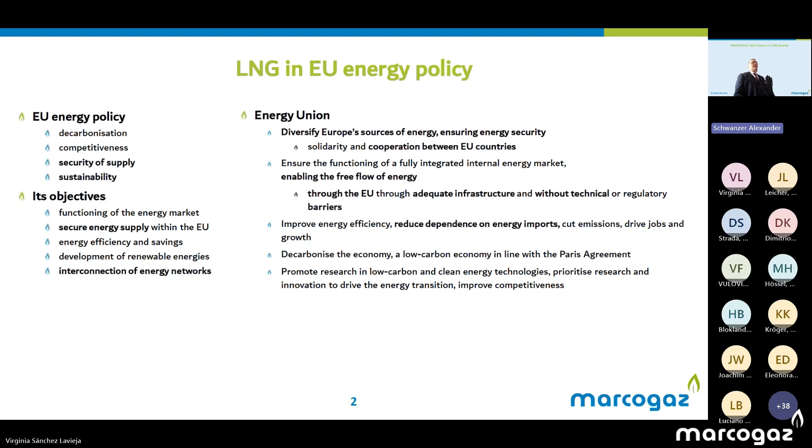Next slide, please. Regarding our achievements within the European community, our general political framework is considered a special achievement of EU energy policy. Behind every energy policy, ladies and gentlemen, is also a strategy for this energy union, which aims to give EU households and businesses a secure, sustainable, competitive and affordable energy supply. The current energy regulatory framework has been adapted with the REPowerEU Plan.

This plan envisages a rapid and complete elimination of dependence on fossil fuels from Russia, as you know. This plan includes, among other things, firstly, the diversification of energy imports. The EU has been working intensively with international partners for several months to diversify energy supplies and curb rising energy prices.

To this end, the member states have established a new energy platform for the voluntary joint procurement of gas, LNG and hydrogen. This energy platform will perform three key functions in joint gas procurement. Firstly, pooling and structuring the increased demand we have in Europe to optimize and transparent use of gas import, storage, and transport infrastructure, with the aim of maximizing security of supply and replenishing storage capacities.

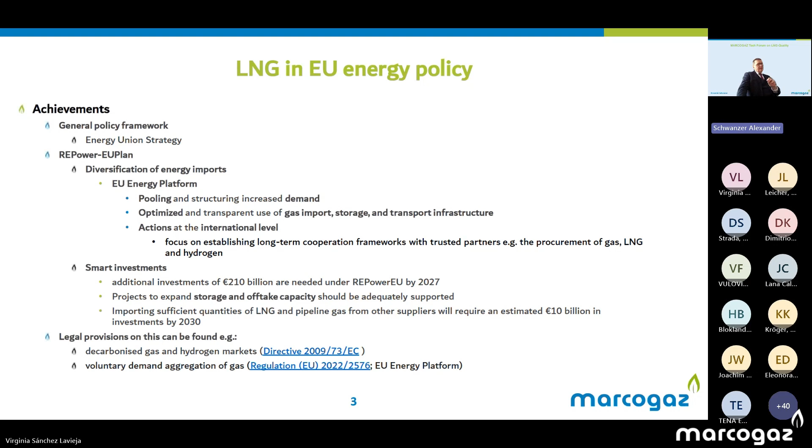Those items being listed can also be found, for instance, in those two legal provisions here on the slide. So, the next and last, third step - our last slide, please.

We know from the current situation that the EU gas demand is around 330 billion cubic meters per year. Natural gas currently represents around a quarter of the EU's energy consumption. About more than 26% of the gas is used in the power generation sector and around 23% in industry. Most of the rest is used in residential and service sectors, mainly for heating buildings.

Following the Russian invasion of Ukraine in February 2022 and its weaponization of Europe's energy supply, the share of Russian pipeline gas in total EU energy imports has fallen dramatically from more than 40% in 2021 to about 18% in 2024. This has been replaced mainly by LNG from the US, which supplied more than 45% of the EU LNG imports in 2024, and reliable pipeline gas imports from Norway, North Africa, and Azerbaijan.

Regarding the global LNG supply, the current situation is expected to continue to rise slightly in 2025, driven by increases in production and liquefaction capacities in LNG exporters. This will ease the pressure on global gas markets and lead, together with historically high levels of gas stocks and subdued demand, to lower prices on the European markets.

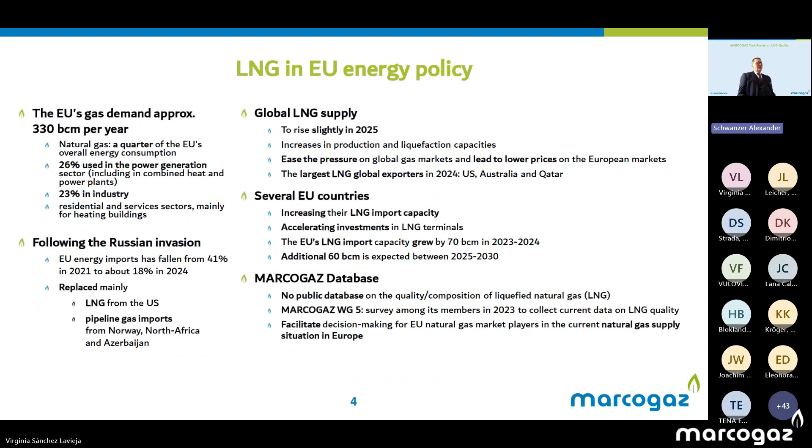And at this point, ladies and gentlemen, I will hand over the floor back to Frederick, our kind expert from MARCOGAZ Working Group 5, and to José, and as well Mr. Jörg Leicher. Thank you. Thank you very much, Alexander, for your introduction and for this first data on LNG in European energy policy.

Our next speaker is José Lana. José holds a degree in chemistry science from the University of Zaragoza in Spain. He has more than 35 years of experience in innovation and R&D activities within Enagás. From 1998, he has participated in many research and innovation projects in the field of LNG, gas transmission and distribution, and utilization of natural gas and now renewable gases, with a special focus on safety and quality issues.

He's currently working at the Innovation and Technical Development Department as R&D project coordinator and gas quality expert, working on projects studying different aspects of natural gas quality, hydrogen impact in transmission pipelines and underground storages. He's been a member for years of several European groups dealing with natural gas and new gases quality, such as NGVA, EASEE-gas, and of course MARCOGAZ, and other groups like the Technical Study Group of GIIGNL. He's also participated in the same working groups dealing with gas quality. Finally, José is currently the chair of Group 5 on gas quality and metering at MARCOGAZ.

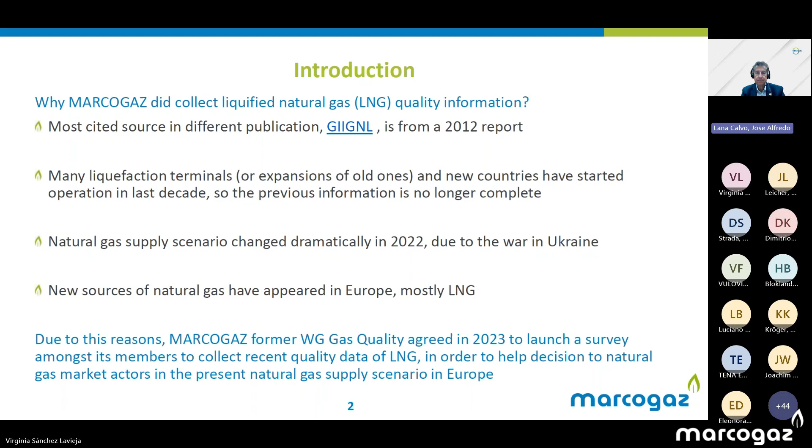Next slide, please. So what is the scope of work we agreed? After a couple of rounds of discussion, we finally agreed on this scope of work: to collect LNG composition data from MARCOGAZ members managing LNG terminals. We want data from each individual cargo downloaded at an LNG terminal—we don't want average data, we want the real quality data downloaded at any terminal for each cargo.

We also ask for information only from cargo coming directly from liquefaction terminals, with no reloading operation between LNG regasification terminals. This is interesting because if you're a shipper, you might download LNG from, say, Qatar in Spain, then reload it and send it to Italy. But in that case we cannot guarantee that the LNG has the same quality as in Qatar, because it may have been blended in tanks at the LNG terminal with another quality. So we want only data from the country of origin.

The idea is to use this information to calculate the main gas quality parameters from different origins. We provide an average gas composition, including the standard deviation, but also the maximum and minimum of each LNG component, to know the maximum percentage that could be expected for each component. Additionally, we calculate the main gas quality properties for utilization, such as gross calorific value, Wobbe index, relative density, and methane number. We present the average of all cargos—values corresponding to the average gas composition—but also give the range of maximum and minimum values.

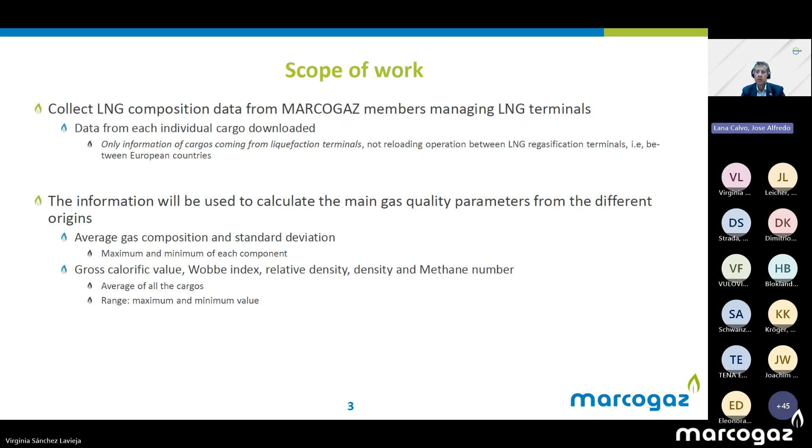Next slide, please. Some considerations regarding the scope of work: it's known that the composition of LNG slightly changes during ship transportation, because LNG is transported at atmospheric pressure in refrigerated, isolated tanks. To maintain the LNG in liquid state, some of it evaporates, taking heat from the LNG and keeping it cold. This means the lighter components, like nitrogen and perhaps methane, evaporate. So the LNG arriving at the downloading terminal is not exactly the same as at the country of origin.

But we consider this change not very relevant. In any case, the information collected from MARCOGAZ member LNG terminals will show approximately the maximum range of composition and properties expected for a specific LNG origin upon arrival in Europe. For instance, LNG from Qatar arriving in Greece is not the same as arriving in the Netherlands—there will be a small difference—but we think the exercise performed allows us to capture the maximum range you can expect.

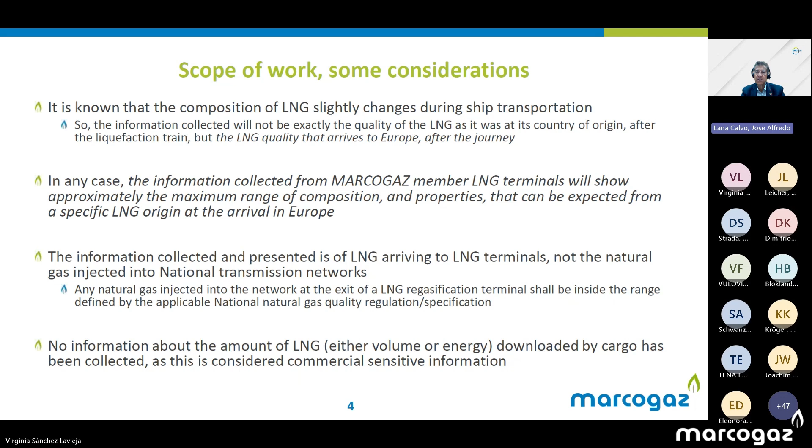Finally, important to say that no information about the LNG downloaded by cargo, volume or energy has been collected. This is considered sensitive information. For this, we have given the report some reference to GIIGNL reports that are very interesting in order to know what is the LNG market, but we are not going to give this information. We think that one of the problems in the updating of the GIIGNL database was the commercial issues associated to the different origins of LNG. We will try to avoid presenting any type of information that could be considered sensitive or attached to commercial issues.

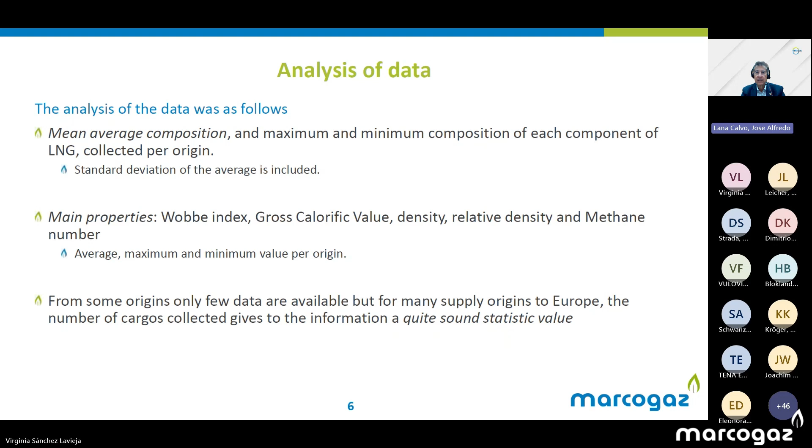Well, going to the different results in composition, we produced tables in which we show the country of origin and number of cargos, the average value of each component in mol/mol, the maximum value of each component, the minimum value of each component, and the standard deviation. Some remarks.

Carbon dioxide is not considered because it's not a normal component present in a measurable amount in LNG. Most of the CO2 is eliminated from natural gas during the treatment of the natural gas before liquefaction. This is one of the main differences between an LNG and natural gas coming directly from the gas field: the absence of CO2.

Neopentane is not considered because its presence is almost negligible in LNG, and besides, most of the gas chromatographs used by the LNG terminal operator didn't detect it. Anyway, as I said, the amount is almost negligible, so it has no impact on the quality of the LNG.

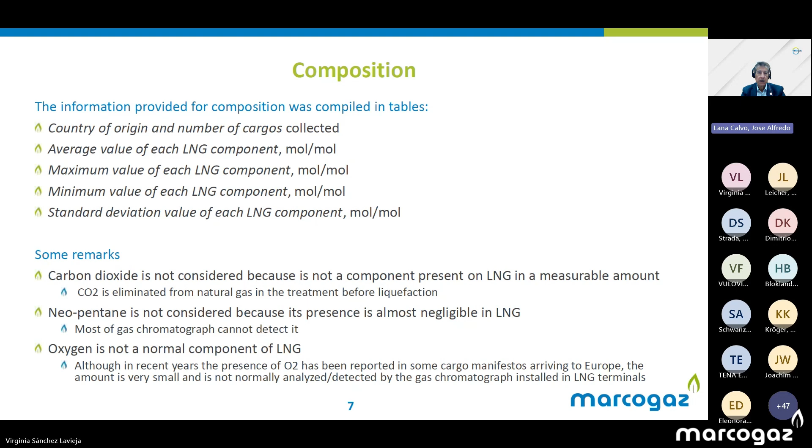Next slide, please. Well, this is an example. In the report we have published, you can find the full tables for the 16 sources. As you can see, in this case from Qatar, Russia, Trinidad and Tobago, and USA, we have the number of cargoes, quite representative I think, and then we have the average composition. The average composition, except if there is an error, should sum to 1. Not the same with the maximum and minimum.

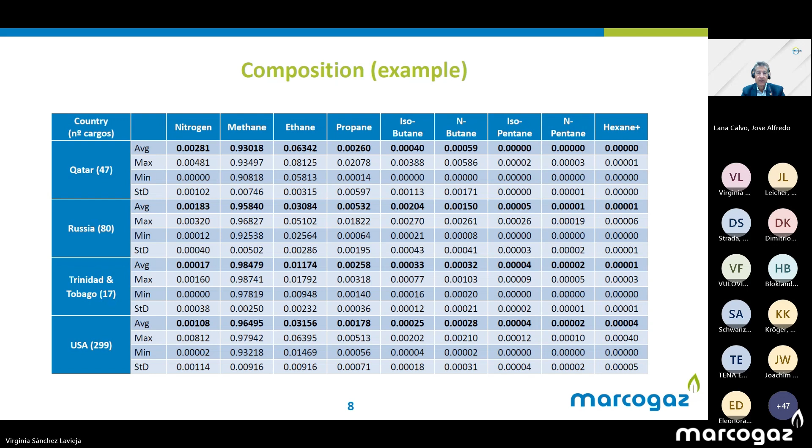Next slide, please. Then, with this information, we have calculated the gas properties. The gas properties have been provided in the report in tables and graphs. For the calculation of the properties, we have presented them in ISO 13443 conditions and following the ISO 6976 standard, which I think is the most used, or the only one used, in the gas sector for calculating gas properties. And for the methane number value, we use Annex A of the EN 16726 standard.

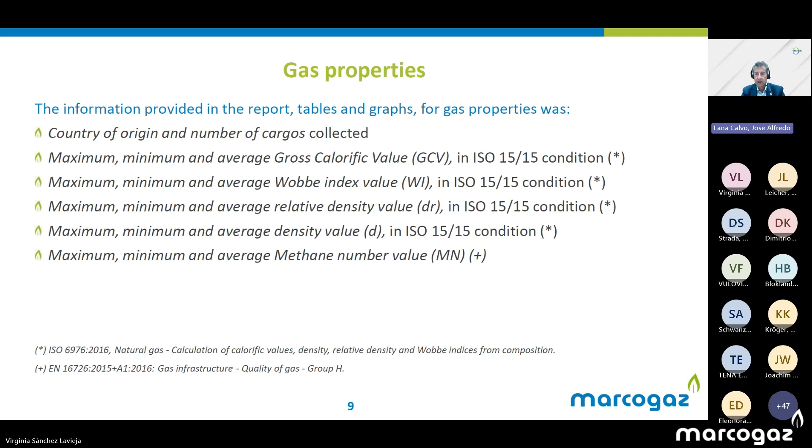Next slide, please. This is the result as we have presented. You can see, in this case, for some of the information received, the number of cargoes for each of them. As is the case of the Emirates, we have only one value, so we have only the average, which is the measured data. We have calculated the GCV, the Wobbe index, and relative density. But for the other origins, we have the average data, and also the minimum and maximum value calculated for the different properties.

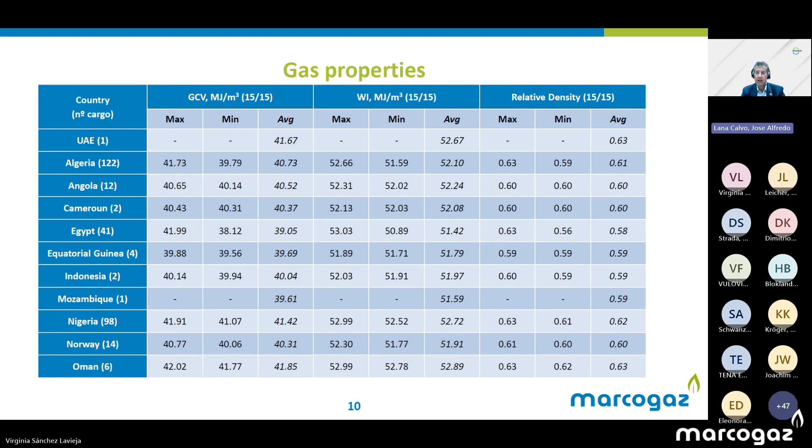If we see this data in graph form, next slide please. What we have presented here is the average, and the maximum and minimum. The average is the dot, and the range, maximum and minimum, is the vertical bar. As you can see, for several countries the range of the delivery is very small. That could possibly be due to a lack of data. But for others, the range is very, very wide. We have not analyzed the reason for this in the report. It was outside the scope, and we think that doing so would require a lot more knowledge about the LNG market than we currently have.

For instance, in the graph for Egypt, you see that the gross calorific value or the Wobbe index range is quite wide. This was quite surprising to me, because in Egypt there are only 2 liquefaction terminals, so the width shouldn't be so wide. But okay, perhaps it's an outlier. I don't know, we have not done that analysis.

It's not surprising, for instance, the value for Qatar or USA, because in both countries there are many liquefaction terminals, each one from a different time and with different technology. That means the LNG will be slightly different from terminal to terminal. Also, in the case of Qatar or USA, there is an impact from the traveling time that, as I mentioned, has a slight impact on gas quality, meaning the properties will be slightly different if we are analyzing data taken in Greece, Spain, or the Netherlands.

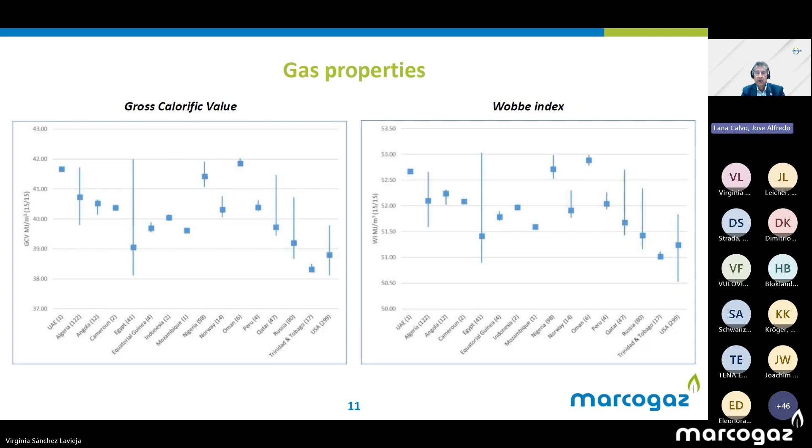Next slide please. Here we have the relative density. We see the spread of the properties from different countries is correlated with the gross calorific value and Wobbe index. The countries in which the range of these properties was higher appear the same in the case of density.

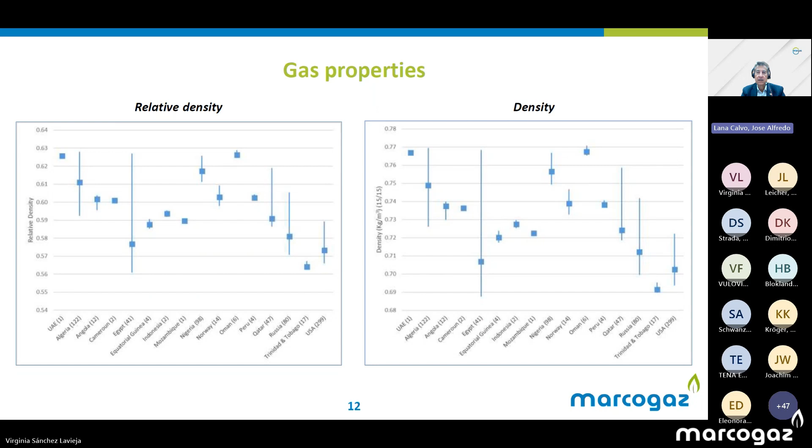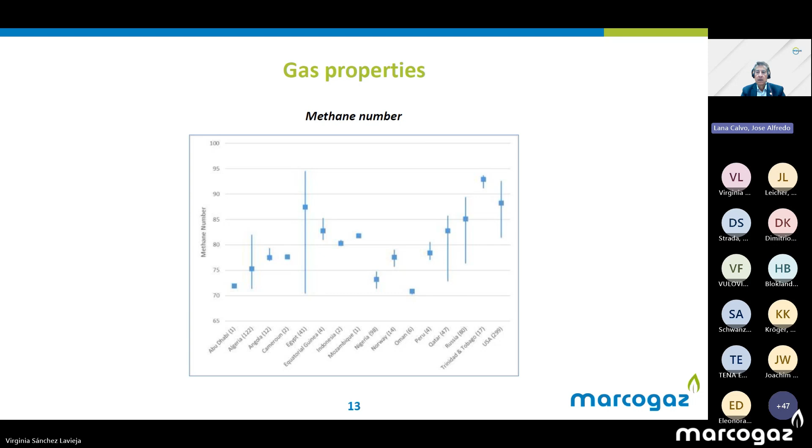So for concluding, what I can say is the MARCOGAZ Group 5 has carried out the exercise of collecting LNG composition information. We analyzed more than 760 cargos, arriving to 5 European countries and from 16 exporting countries. The main properties of the LNG have been calculated and presented in the report, but as we have presented, given the information about the composition, anybody can calculate other properties or calculate the same properties using another calculation method or standard. Finally, the process has been described and published in a report that is available on the MARCOGAZ website. I think that's all.

Thank you very much for your attention. Thank you. Thank you a lot.

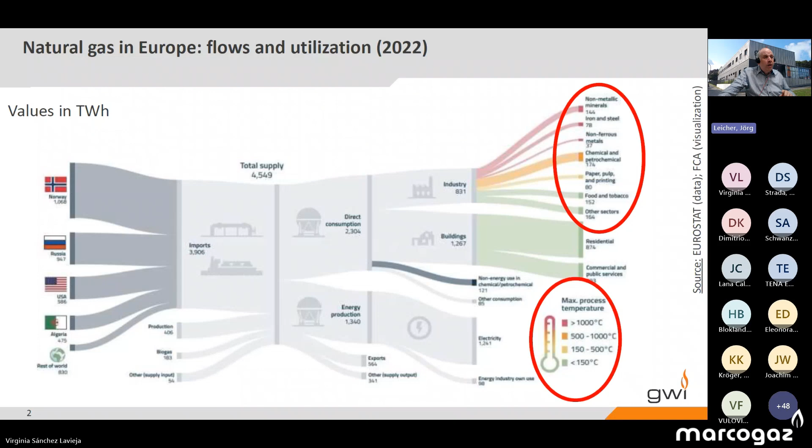However, if we think about gas as a fuel, we can simplify things a little bit. Please keep in mind this is a simplification. But basically, every technical combustion process can be characterized by two process parameters. The first is the firing rate, which tells me how much energy is being introduced into the combustion process with the fuel. The second important parameter is the air excess ratio lambda, which tells us how much air or oxidizer is being introduced compared to the theoretical minimum amount of air needed. If you want to burn something, you don't only need a fuel, you also need an oxidizer, which usually is air.

Note that both these key parameters are directly dependent on the fuel composition. If you want to calculate the firing rate, you need a calorific value—usually in industry, the net calorific value—but you need the fuel composition to some degree. And to calculate the air excess ratio, we need the minimum air requirement, which is also only dependent on the composition of the fuel.

This means that every gas-fired combustion process is in principle always designed and then later adjusted for a specified fuel gas in order to fulfill its purpose in a safe, efficient, and environmentally friendly way.

Now let me say a few words about adjustment, because it's really important. Whenever you put a process into operation for the first time—no matter if it's a residential heating appliance, a gas stove, an industrial furnace, or a gas turbine in a power plant—these systems are always adjusted, which means the volume flows of the fuel and oxidizer are set so that the device fulfills its purpose with optimum performance.

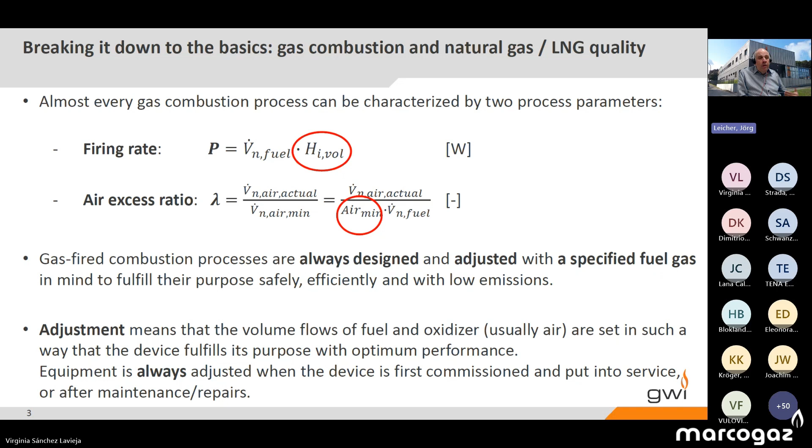Next slide, please. This has a certain consequence when we think about gas quality, because as an end user, I don't really care about the national specifications of gas quality in a large geographic region, like all of Germany or even all of Europe. I'm much more interested in what's happening at my location at this moment in time. And I'm also much more interested in the relative change of the local gas quality compared to the gas that my system was originally adjusted for.

This is a very different perspective compared to what the gas industry does, because if you look at the specifications of gas qualities in Germany or Europe, they tend to talk about large geographic regions and absolute values. They want to give you the minimum and maximum permissible Wobbe index, or the minimum and maximum gross calorific value, or a minimum methane number, or something like that. As an end user, this is nice to know, but it's not really relevant for me.

For me, it's really about the relative change of the local gas quality compared to what my gas was originally adjusted for. Because my system was designed and adjusted for a specific fuel, if there's a change in the local gas quality—for example, a change in the firing rate or a change in the excess ratio—unless I respond to this change, there will be an effect. My performance may not be as good as I want it to be at the design point. Obviously, the stronger the fluctuation, the stronger the consequences of the gas quality change can be.

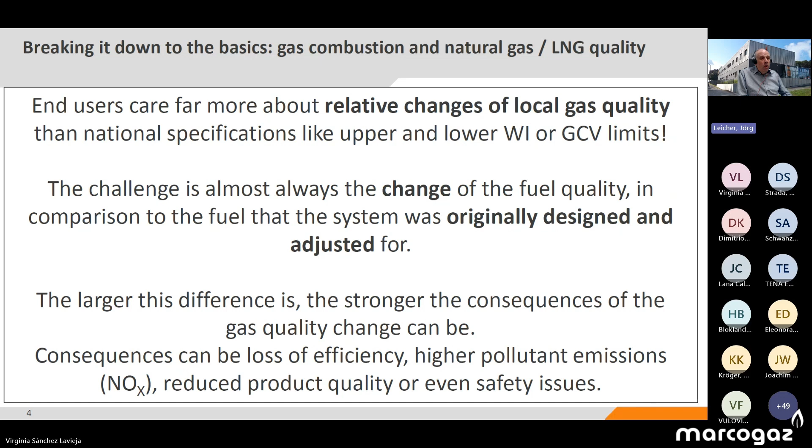Now, obviously, there's a big difference if you look at residential equipment compared to industrial equipment or equipment in power plants. These differences are also reflected in the way these systems are adjusted. For example, if you look at the residential sector, gas-fired heating appliances or stoves are usually operated and adjusted for very high excess ratios.

So we have excess ratios of something like 1.2 to 1.4, so 20 to 40% more air than theoretically needed, which is a lot, but it makes sense if you look at how residential appliances are being used and who is using them.

Second main difference, at least in theory, these appliances are adjusted by the manufacturer on the factory floor to a specified gas quality, usually a reference gas, G20, specified in EN 437, which means basically pure methane. I say supposedly adjusted by the manufacturer because we know that in practice, many installers still adjust residential appliances on site based on an unknown gas composition, which you can do. You don't need to know the gas quality in order to adjust an appliance.

You can use the output data from the process to do that. But at least in theory, residential appliances should be adjusted by the manufacturer, then sealed and shipped to the final destination. Industrial combustion processes, however, have to operate with much lower air excess ratios.

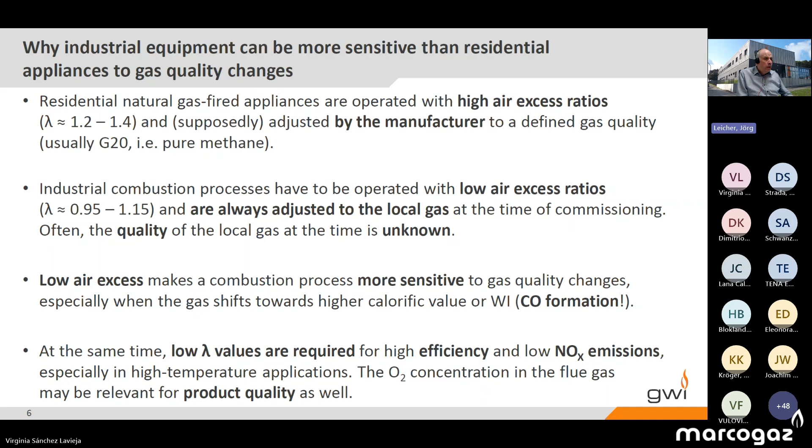So I've been talking about gas quality, and if you look at the discussions about gas quality, usually the Wobbe index has a very prominent role. The Wobbe index was originally introduced as a very easy way to assess the impact of a fuel change on the heat release on a simple, uncontrolled combustion process. By definition, it means that if two gases have the same Wobbe index and are burned at the same nozzle with the same nozzle pressure, they will release the same amount of heat. So these gases are interchangeable in terms of heat release.

I can use a simple gas combustion appliance with both gases without having to physically change the hardware, which is a perfect definition for the residential sector, because that's exactly what's needed there. So the Wobbe index is extremely important from the residential or commercial end user's perspective.

It is also to some degree relevant for larger industrial applications, but not to the degree that we have in the residential sector. So if you talk to industrial users about gas quality, they will usually focus more on calorific values, for example, or maybe methane numbers if you're thinking about gas engines. But the Wobbe index, at best, from their perspective, is one fuel quality criterion amongst many.

And the reason is that the Wobbe index only really considers heat release. So many other important aspects of a combustion process are not described, cannot be described by the Wobbe index. So the Wobbe index doesn't tell you anything about safety, about emissions, about efficiency, about temperatures, about combustion stability.

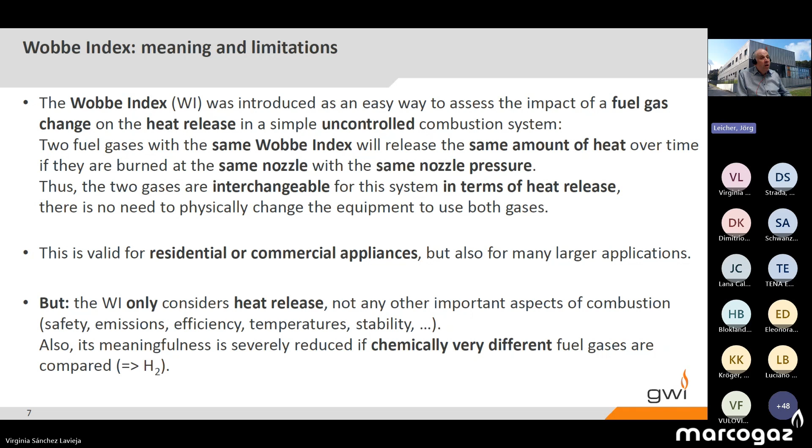And especially in the current discussion about hydrogen, we have to keep in mind that the Wobbe index is only really meaningful for chemically similar fuels. So it makes sense to look at different LNGs in the context of the Wobbe index. It makes sense to look at the differences between L gas and H gas looking at the Wobbe index. But once you start talking about chemically very different fuels, like for example methane and hydrogen, then the Wobbe index is far less meaningful. And I want to show this on the next slide with a brief example.

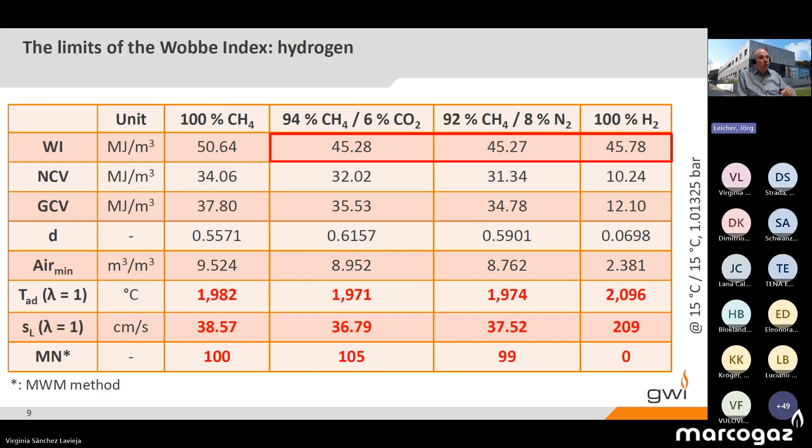So what does all this mean if we think about gas quality, if we think about LNG, especially maybe in regions which are not used to getting LNG? And this is an example, it's an older example from France. France has some experience with strong

locally fluctuating gas quality. So this is an example from 2016, where the grid operator noticed that they had seen 5 major changes of the local gas quality at one measurement point within 2 days.

And a major gas quality change here means something like 2 megajoules per cubic meter, which is about 4% of the Wobbe index. This, if you look at what's permissible in European grids right now by looking, for example, at the EASEE-gas Common Business Practice or what's going to be in the upcoming EN 16726, this is still a relatively moderate change, but from an entry range perspective. But still, for an end user, this is already a very significant change.

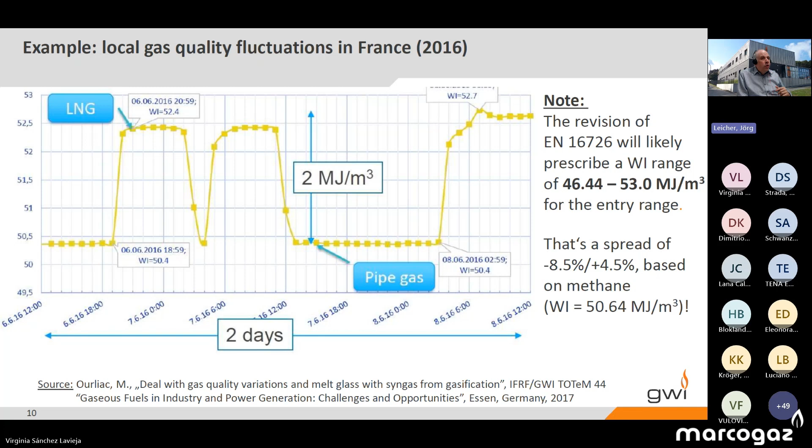So something, a larger industrial furnace, and I adjust it to the locally available gas, which at the moment may be pipeline gas. So with a Wobbe index of 50.4 megajoules per cubic meter, and I adjust it to a reasonable excess ratio, something like 1.05. So what happens to this system if now it's being exposed to LNG with a much higher Wobbe index of 52.7?

We're assuming for the moment that we don't have any combustion control, which you really should have with such a furnace, but I want to show why we are so sensitive here to gas quality variations. So if my system, which was adjusted to pipeline gas, is now being confronted with LNG with a higher Wobbe index, what that means is that, first of all, my firing rate will go up, so I put more energy into the system, which can be a problem, but must not necessarily.

What really is going to be a problem is the excess air ratio here, because my excess air ratio drops from 1.05 to 1, which means I'm running my system basically at stoichiometric conditions, which is an unsafe state because I'm going to produce a lot of carbon monoxide. So this is definitely a safety-related issue.

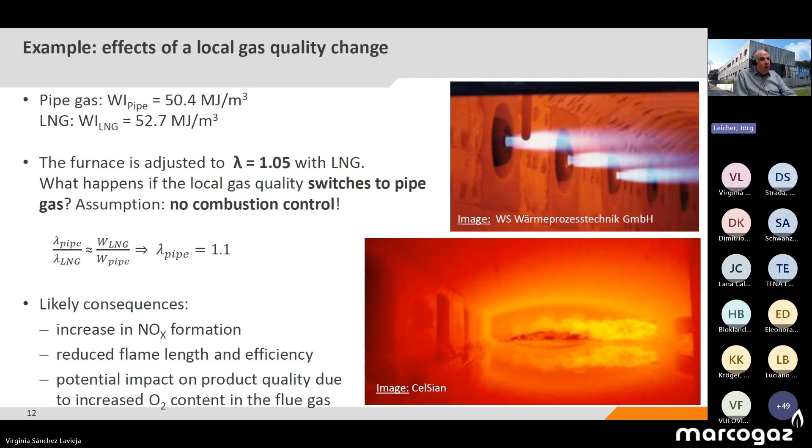So much narrower than what we saw in Jose's slide about LNG qualities, and definitely much narrower than what we have, for example, in the entry range of the upcoming EN 16726, or what we have in EASEE-gas, or what we have in German gas quality specifications. So we have a significant mismatch here between the requirements on the end use side and the gas quality specifications that are in place today.

And what they say, if you have stronger fluctuations than plus minus 2% of the Wobbe index, then you need to think about combustion optimization, which often means combustion control. Next slide, please.

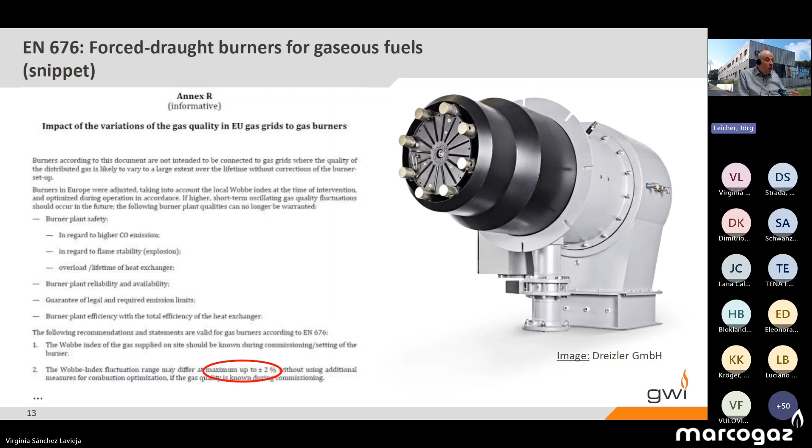They tend to go towards the lower end of the Wobbe index or calorific value ranges, which means that as an end user in the future, it's going to be more likely that I'm going to see stronger changes than today, simply because I will have probably more gas injected at the upper end of the Wobbe index range, and I will also have more gases being injected at the lower end of the range.

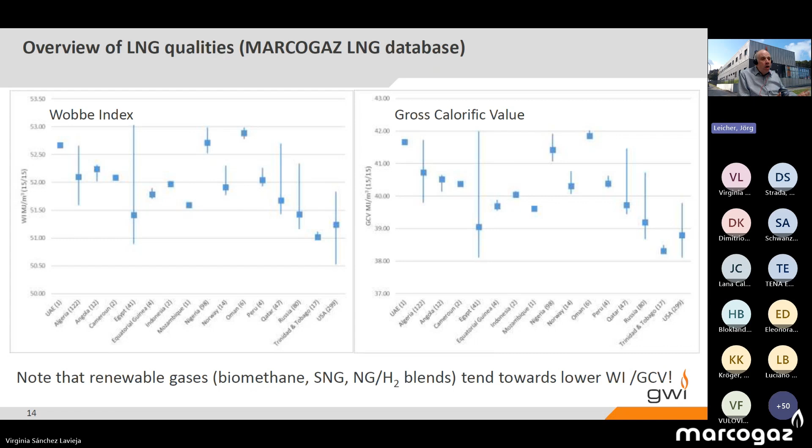So as an end user, I have to prepare for stronger local fluctuations depending on where I am in the grid, and depending on the grid topography, and of course depending on flow patterns in the grid.

Next slide, please. Now the question is, what do you do about it? Because we have to address this in some way, and this is actually inspired by a real-life example from Germany, where we had a case that the operator of an industrial furnace noticed that sometimes the flame in his furnace would increase in length quite significantly for no apparent reason, and he couldn't understand why, because he hadn't changed anything.

So he started investigating, and at some point he figured out it's actually the gas that I'm being supplied with that causes these changes in the flame length. This was located in eastern Germany, a traditional Russian gas region, and his furnace was adjusted to Russian gas.

It was adjusted in such a way that it would always keep the volume flows of fuel and oxidizer constant, independent of the actual gas being supplied, independent of the pressure. And he noticed that whenever he was being supplied with North Sea gas instead of Russian gas, the flame length would increase. What's interesting here is that the Wobbe indices of both gases are basically the same, but for this furnace, the Wobbe index as a gas quality criterion was relatively uninteresting.

What's actually more interesting here is the calorific value, and North Sea gas has a calorific value which is about 4% higher than Russian gas, and we wanted to figure out what's happening here and what we can do to deal with this issue.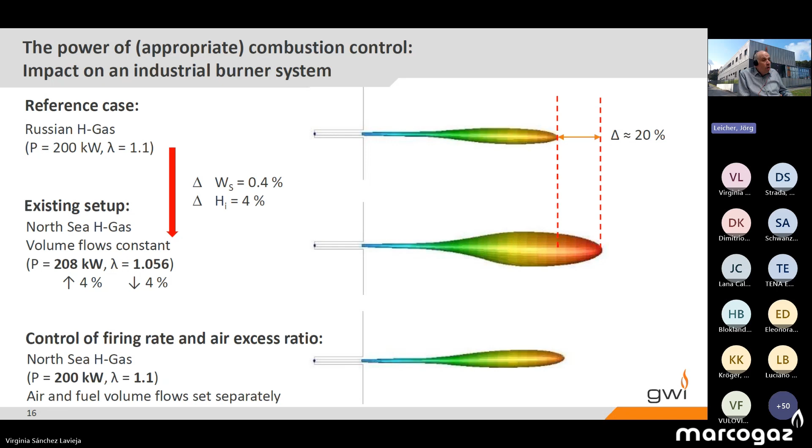Next slide, please. So basically, that's what we recreated in our simulation. And as you can see, of course, now the firing rate is where we want it to be. The air excess ratio is what it was supposed to be. But also the flame length is just as it was supposed to be. So this highlights how we can use combustion control to deal with these issues.

But we need to have some kind of information about the local gas quality, and we need to have the means to respond to the gas quality change. So this is about first detecting a gas quality change and then responding appropriately to it.

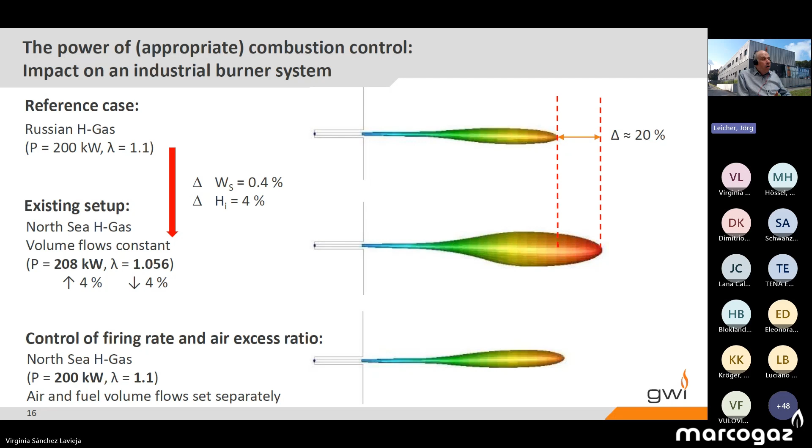And I want to show you in the next few slides how this can also go horribly wrong if you don't have a proper control setup, because not all control systems or combustion control systems are created equal. Many industrial control systems were never really designed to take into account gas quality variations. And this is one example - actually a glass melting furnace from Spain.

It's an oxygen furnace, so they run with pure oxygen instead of air, but it doesn't really matter for our discussion here.

So they started great because they had a local gas quality measurement device which detected that the calorific value of the gas they were being supplied with changed by about 5%. So they had a 5% increase in the calorific value, and they responded perfectly by reducing the volume flow of the gas by 5% in order to keep the firing rate right. So perfect response, just as you should.

Next slide, please. But then things go wrong, because now they had what's called a fixed ratio control. Basically, they had a setup which keeps the volume flow of the fuel and the volume flow of the oxygen at a fixed ratio, which is something that you don't want to do if the gas quality actually changes.

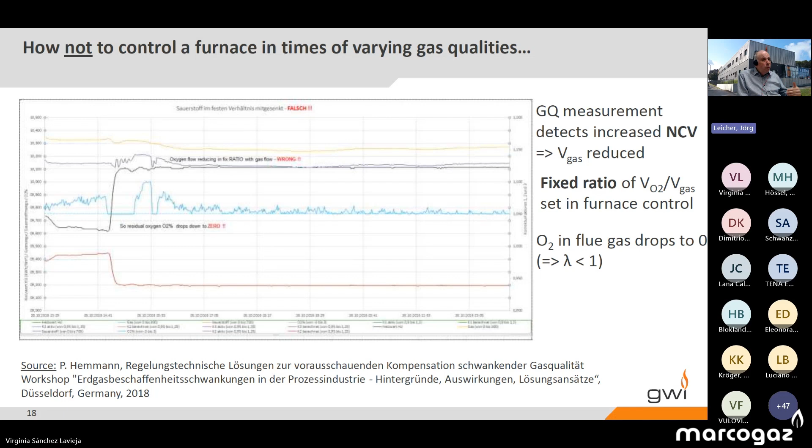So what happened? The firing rate goes down, the volume flow of the fuel goes down by 5%. The air excess, the volume flow of the oxygen, also goes down by 5%, which means the excess oxygen is reduced to 0. We see the blue line here. So the system becomes substoichiometric.

And then if you look at the next slide, you'll see what the consequence is going to be. The system slips into substoichiometry. We produce extreme amounts of CO. I don't know if you can see that here, but they started producing about 37,000 ppm of CO, so way beyond any safety limit.

The system couldn't get into a stable state again because we had conflicting control activities. And in the end, what happened was that the furnace operator had to shut down the control system altogether. They had to manually intervene in order to bring the system back into a safe state.

And as you can see, if you look at the x-axis, they had a lot of fluctuation there, so it took them an extremely long time to get the system stable again. And in fact, even after about 7 hours or so, the system still saw significant fluctuations.

So this just highlights that if you think about combustion control in terms of fluctuating gas qualities, you need to be sure that it's an appropriate gas quality control, combustion control, which can really take into account gas quality variations.

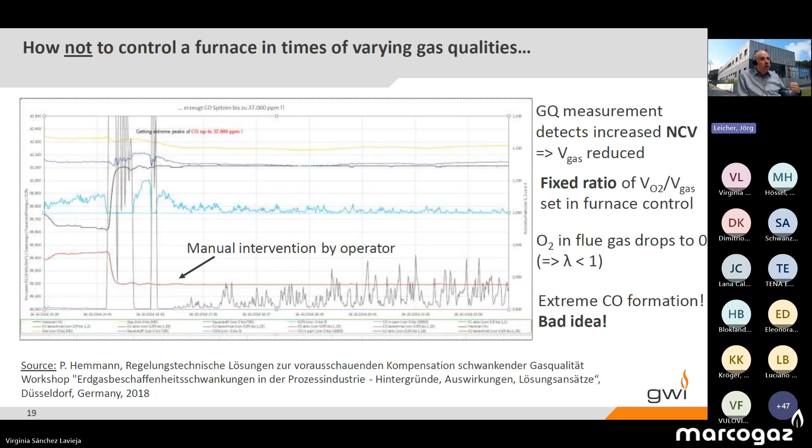Next slide, please. And this is something that many industrial systems still don't have, because many industrial control systems are primarily used to change loads, but they inherently assume a constant gas quality. And especially if you think about different LNGs or changes between LNG and biomethane or something like that, then a fixed ratio control system will not be able to deal with that.

So this is something to keep in mind when we talk about gas quality changes from an end user's perspective. This is really something that we need to address, and where also the support of the gas industry is needed, because these are discussions that are often quite new for many industrial end users.

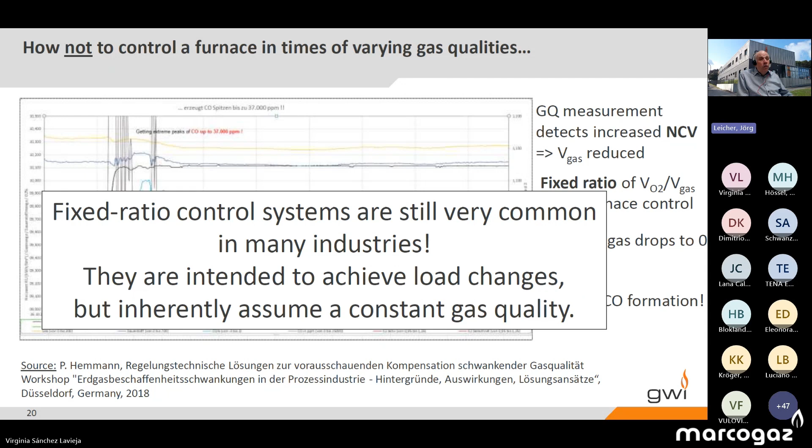Next slide, please. And I think the next slide should be the last one. To conclude, natural gas and LNG utilization is extremely heterogeneous, extremely diverse. Especially when we talk about industry and power generation, gas-fired large-scale equipment is operated under very different conditions and constraints than residential appliances.

And for end users, it's usually the relative change of the local gas quality that's important. So end users don't really care that much about the minimum or maximum permissible Wobbe index in Germany, or the minimum or maximum calorific value. They're really much more interested in what's happening locally.

How different is the gas I'm being supplied with right now compared to the gas that my system was originally adjusted for? Generally speaking, and this is also to some degree the case for residential equipment, but it's much more severe for industrial equipment, the acceptable gas quality variations tend to be much smaller than what the regulations allow into the grids.

Of course, the question is also what is an acceptable gas quality variation. We need to keep in mind that from an end user's perspective, especially for industrial or power generation end users, the Wobbe index is not as important a criterion as in the residential sector.

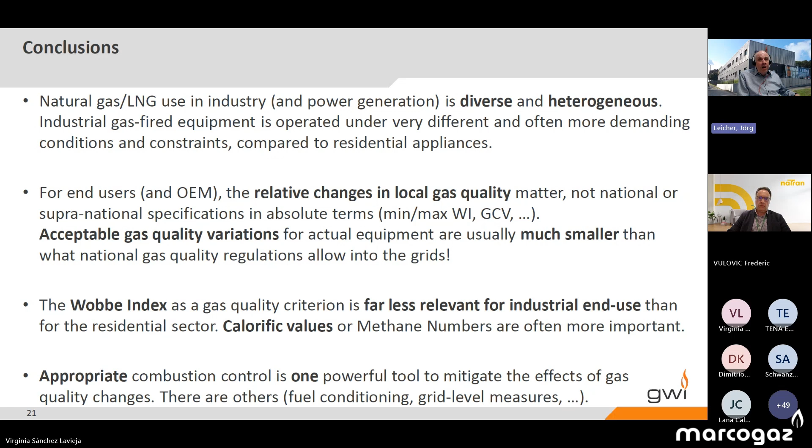And I think with that, I probably have talked too much already, but thank you for your time. And I'll be happy to discuss this in much more detail if required and if you're interested. Thank you very much. Thank you.